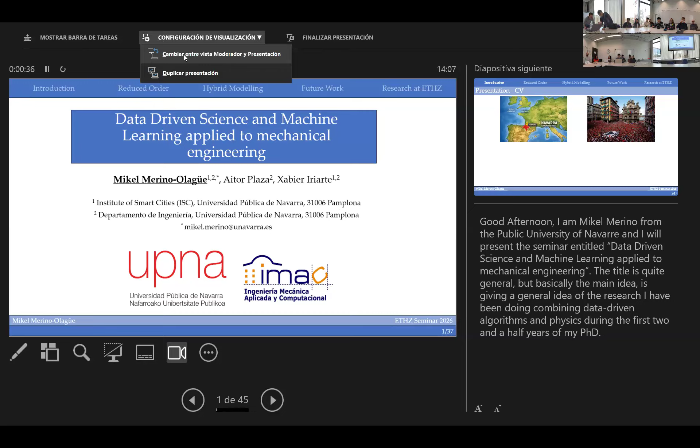And now we see that. Okay, so go out from Zoom. Go out from screen sharing, and then first open full screen on your laptop, and then share that screen.

I need to swap again. It's a bit complicated, but yeah. Is it now? And now share on Zoom on that full screen. It is good, yeah.

Okay, so good afternoon, everyone. I'm Mikel. My main goal is to tell you what I did.

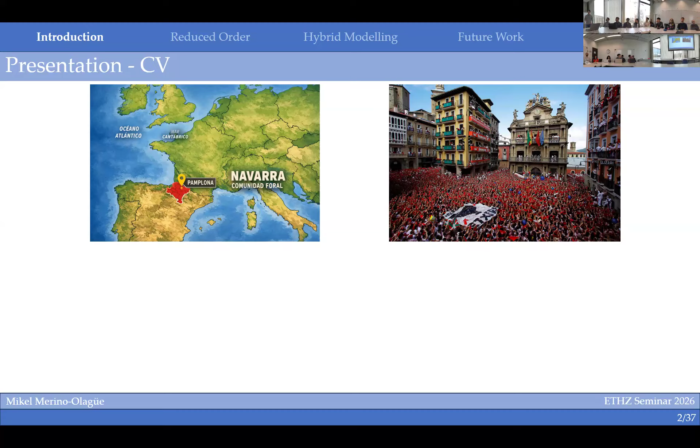So I did the industrial engineering bachelor, and I did a master's in applied and computational mechanical engineering, and then I started the PhD at the applied and computational mechanical engineering group. So in this group...

we basically do modeling, simulation, identification, and optimization of different mechanical devices. Also, there are some other research staff which are working on structural analysis. We have been also working in mechanical vibration.

Where on the left we have a recent work in solar panels, characterizing them with modal analysis. Also, we have been working in wind turbines and robotics, so quite multidisciplinary, but always focusing on modeling.

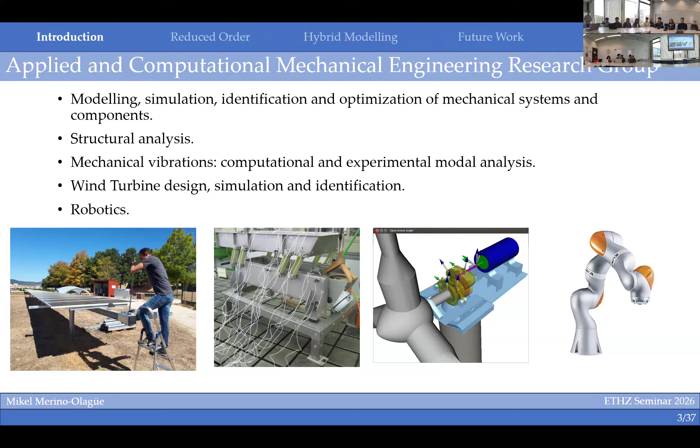So, during my PhD, the idea was to start using data-driven science for some tasks that we think could be beneficial for us. So we first started with reduced order modeling in wind turbine blades. I will give you a little hint about this, but right now this research line is quite paused, and I'm working more on the hybrid modeling task.

So the hybrid modeling task was originally developed to overcome an issue we have with this small device, which is an energy harvester that I will tell you a little bit about later. But basically, the problem was that there's a magnetic interaction, which is difficult to model. So here is where we decided to combine our physical knowledge

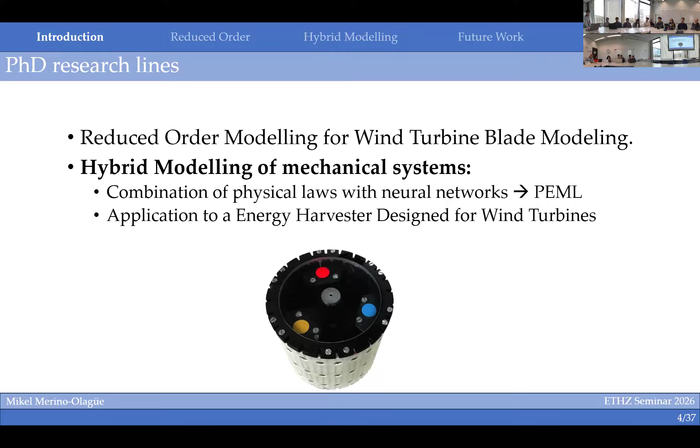with some machine learning. Okay, so as I told you, I will start with wind turbine blade modeling. Till now, with the smaller blades, the simulation programs usually with one or two modes per blade was enough to model those blades.

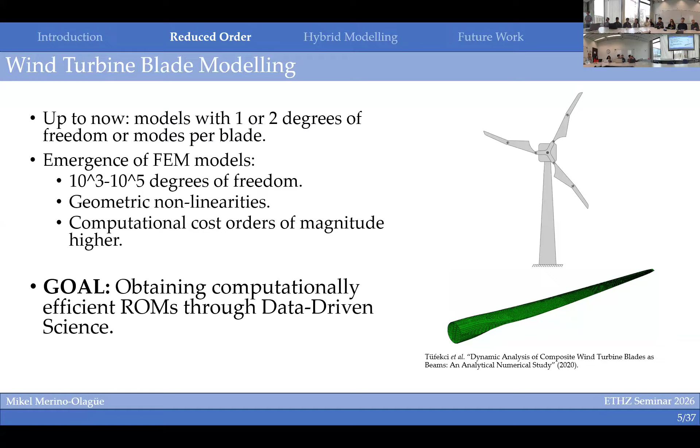So we basically thought about using a simple methodology, it's dynamic mode decomposition, which basically uses data to do a spatial temporal decomposition and obtain reduced order models. So basically what we do, on the left, basically data is collected, then we have two time shifted matrices, basically matrix X prime is shifted, so we can relate those through that state transition matrix A.

And then we have our regression problem, which is solved with the pseudo inverse. And here, depending on how many singular values we use on that SVD decomposition, we can get a reduced order model with different sets. So that was our idea.

We have also other variations of this algorithm. We have DMD with control, where we try also to estimate a B matrix to account for that external input. Extended DMD, where basically on that data collection, we also use a dictionary of functions to account for nonlinearities, and higher order DMD, which uses time delay embedding to use several instances to predict the next.

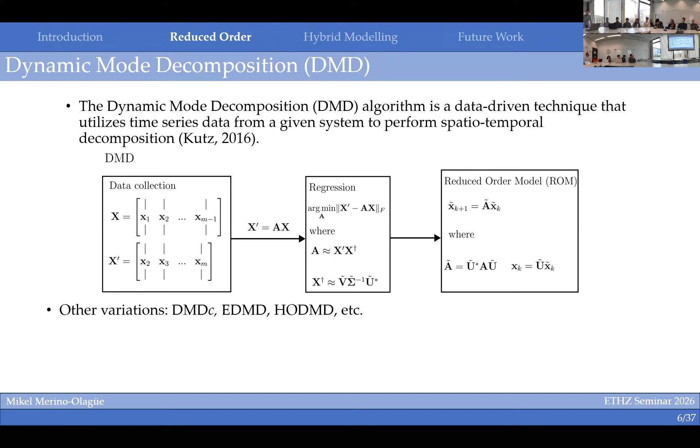Since our idea was to use this on nonlinear problems, we started with a numerical example, the most simplified wind turbine blade, a cantilever beam with geometric nonlinearities. In this case we used a really low Young's modulus to get really high deformations, and we tried cases with arbitrary initial conditions, external loads, and different scenarios.

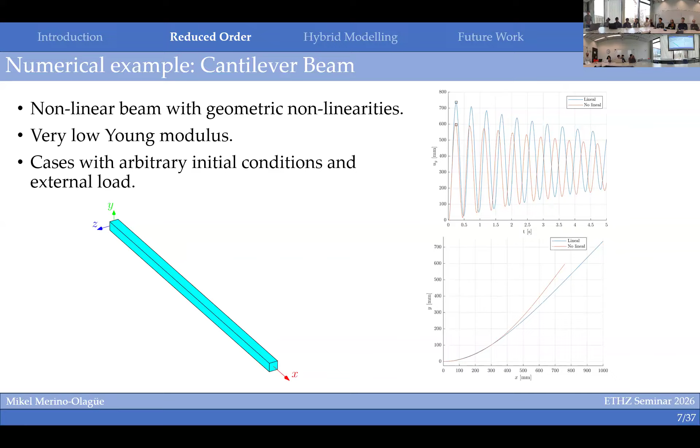If we compare the linear behavior in blue and the nonlinear in orange, we can see that the displacement of the free end node is completely different. And if we look at the deformation of the blade, it's also completely different. So in theory, a linear model won't make any sense.

But we first tried with this DMD methodology. It's very simple: we use finite element modeling, simulate the model, and collect those data matrices. The last one is with the external inputs, so depending if we use it or not, we get a reduced order model with the possibility of using external inputs or not. Then we validate the different models and use them for simulation.

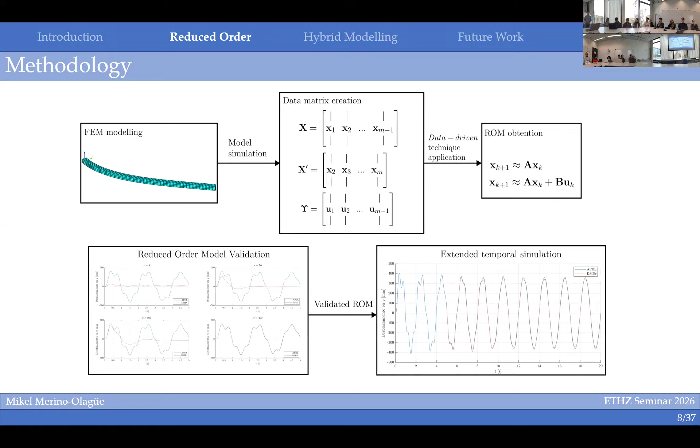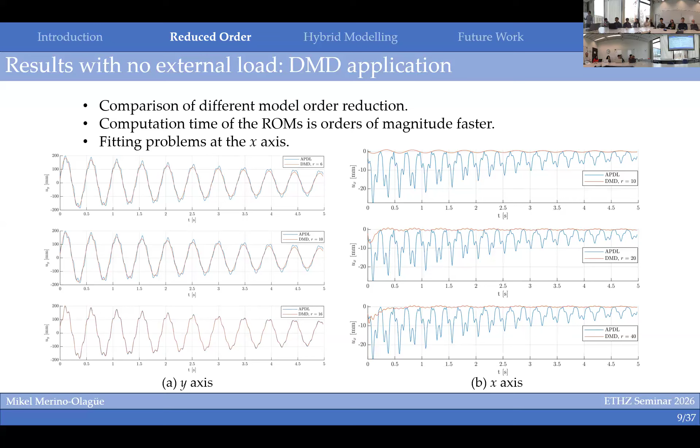Using DMD here all the time, in blue will be the simulated data, and in orange the model. We can see that if we use more singular values, we get a better model. But in this case, we could capture the dynamics on the y-axis, while on the x-axis, since it's more nonlinear, we couldn't capture it. So that's why we jumped to higher order DMD.

And in this case, we got a massive overfitting, and basically the model was only usable for this specific case. So if we change slightly the initial conditions, it won't work.

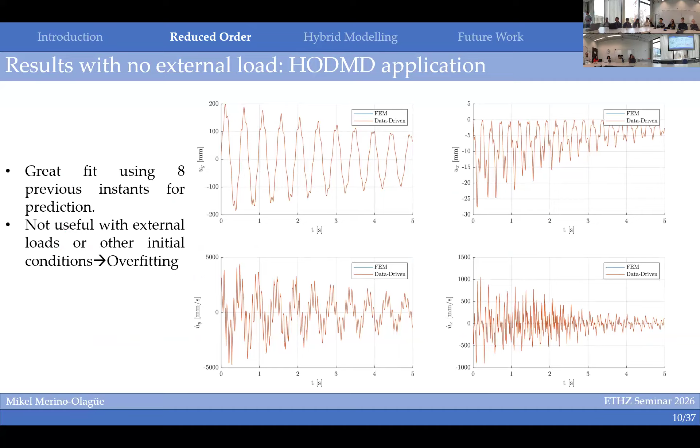Obviously, DMD with an external load is problematic since we don't have that B matrix, or we are not estimating it. Using a lot of singular values we could get a decent result, but on that matrix, unstable poles were appearing - you can see there are red, so the models were basically unusable.

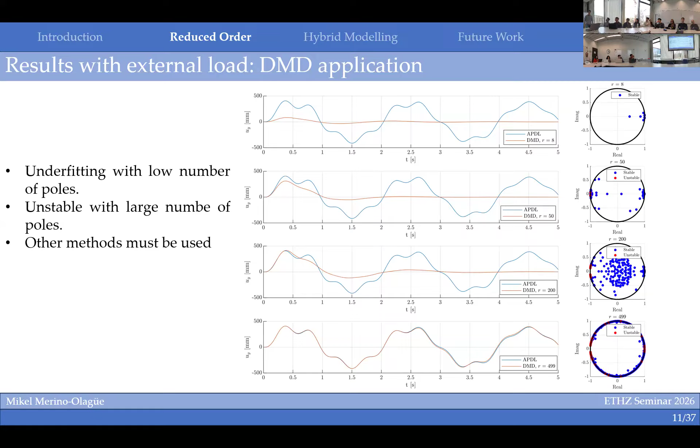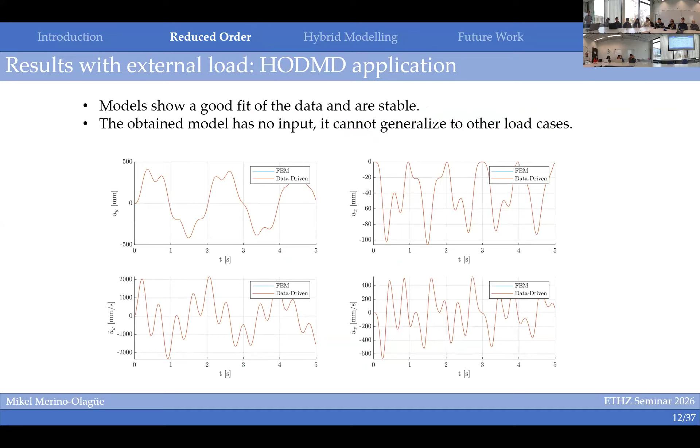Higher order DMD again is able to capture the dynamics, but again we have a massive overfit, and we don't have any possibility, since we don't have a B matrix, to use it in other load cases.

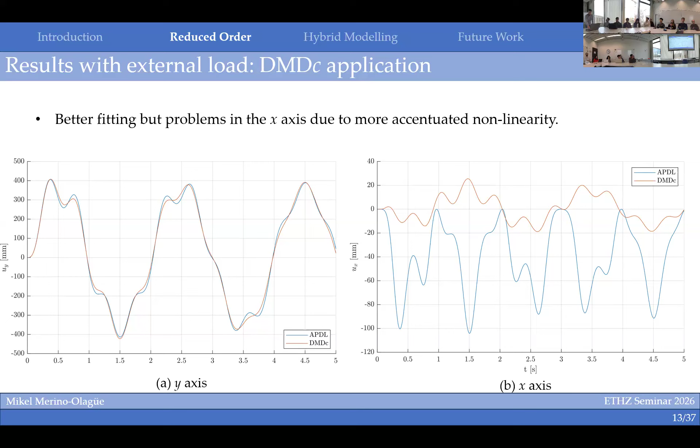With DMD control we solve some problems, but again we are not able to capture the nonlinearity on the x-axis. So we decided to add control to higher order DMD, and also to add those dictionary functions from the extended DMD.

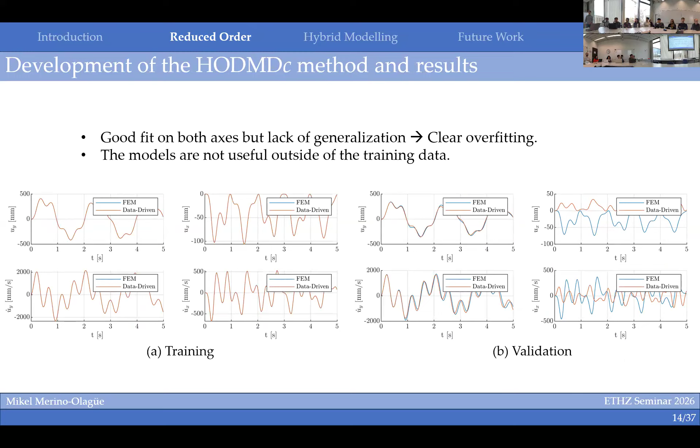But still, even if we were able to fit the data, we got a clear overfit. By introducing a slight change on the external load, we couldn't then validate the model, so basically the only use of all of this is maybe using it as a surrogate model - adjusting the model with the first couple of seconds, and then if the external load case and everything is exactly the same, it could work.

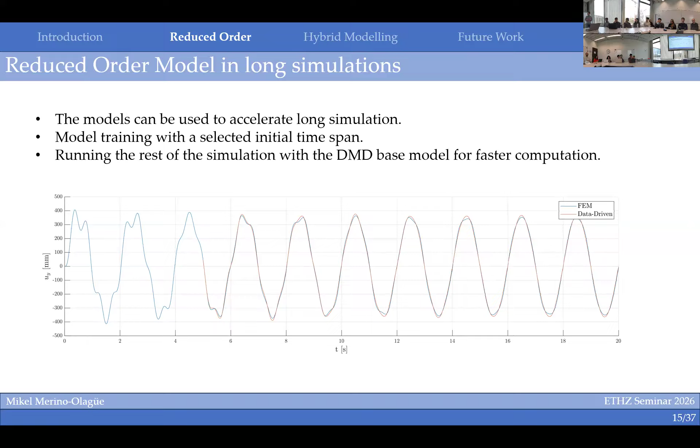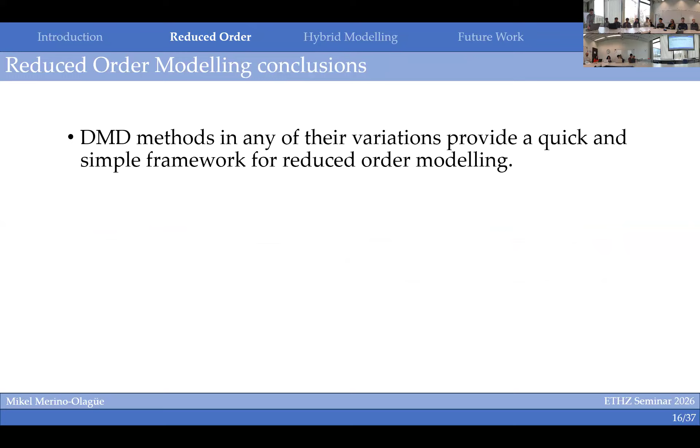But honestly, this led us to pause this part of the simulation and go to another task, since it wasn't good. So as I told you, it's quick and fast, but it either underfits or overfits the data.

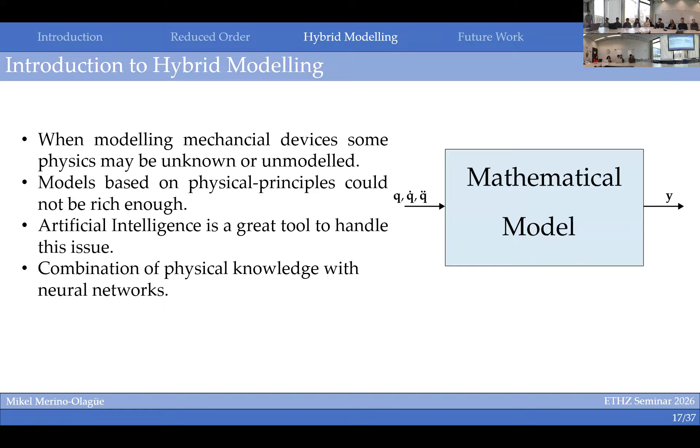So going into hybrid modeling, this is a completely different task, but we will also use data-driven models. Usually when we have a mechanical device, we would like to have a mathematical model - in this case, for example, position, velocity, and acceleration as input, and then we estimate the external output we are getting. But as I told you, in the energy harvesting device, some parts of the model may be unknown. That's where we decided to introduce a machine learning algorithm, a neural network, or something else - so here is hybrid modeling.

So as I told you, all this came from this problem, which is the modeling of an energy harvesting device. This small device has more or less the size of 10 centimeters, and you can hold it with your hands.

It's intended to be located in the nacelle of the wind turbines, and the idea is that it uses the vibration energy of the nacelle to obtain a small voltage, which will feed an autonomous node, thought for wind turbine monitoring. So basically, it will feed all the accelerometers and even the post-processing part.

So this small device has two parts. One part is basically a stator, which has some coils, and the inner part are three blades with some magnets. When the wind turbine vibrates, these three blades are moving, and they create a variation in the magnetic field, which induces a voltage in the coils of the stator. We get a small amount of energy, but this is enough usually to feed those small sensors.

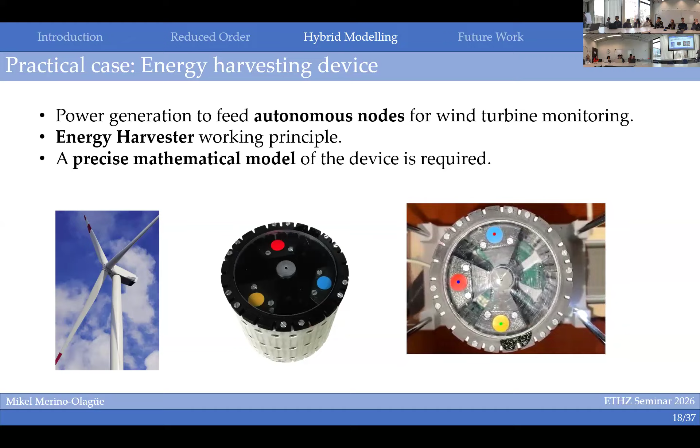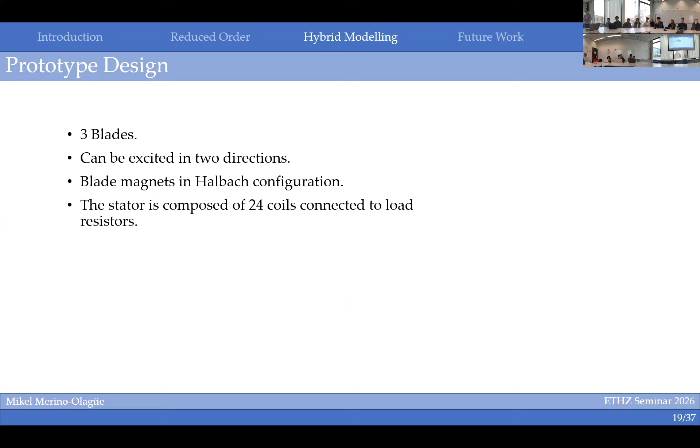So as I told you, the harvester has three blades. The magnets are in a Halbach configuration, which is important from the electrical point of view, and we have 24 coils. This was also adjusted by the guys working on the electrical side. As I told you, we have the three blades and the stator with the magnetic coils.

Coming into the modeling of the dynamics, you can think of this system as basically composed of three pendulums, but those three pendulums have an interaction between them which is magnetical and is quite difficult to model.

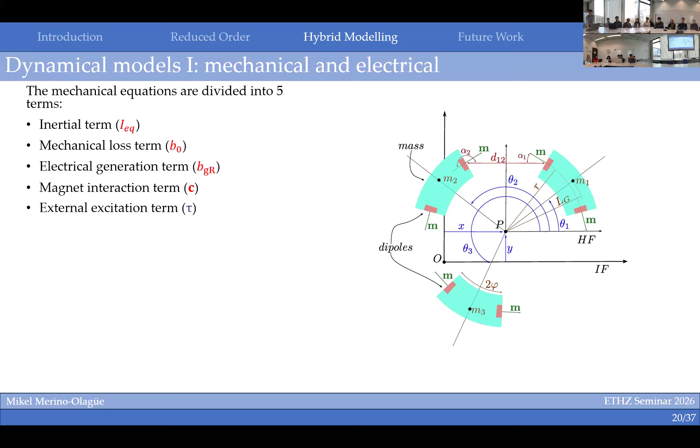So we have five terms for the equation. We have the inertial term, the mechanical loss term, the electrical generation term, which depends on the resistor connected to the coils—this will make the system more damped or less, and the energy output different, and this has to be adjusted as well. We have the term for the magnetic interaction, and the external excitation, which is basically the vibrations of the mass.

And here, as you can see on the left, we have that magnetic interaction, which only depends on the positions of the blades. We also have the electrical part, which is a model depending on that electrical generation term, and we can get the power output of the device with this.

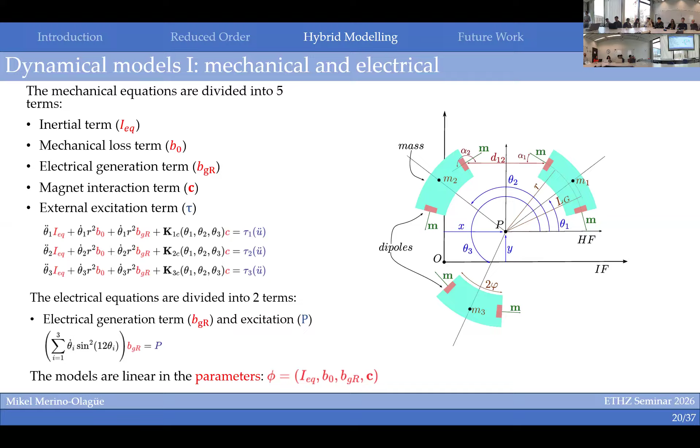And as you can see, the models are linear in the parameters, so we always have something multiplying the parameters, and this is really positive, since we can then use least squares to solve the identification problem.

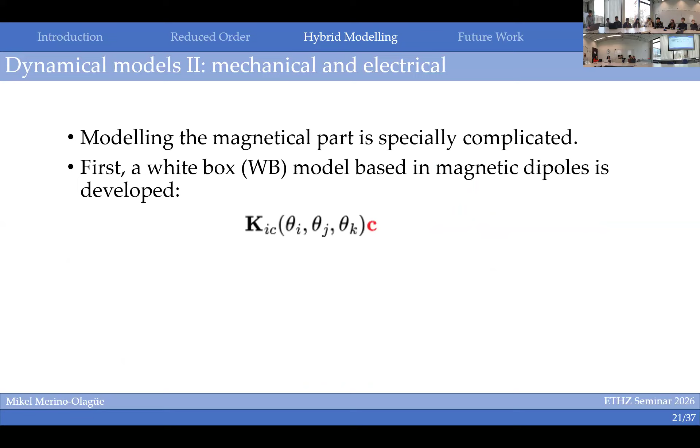So as I told you, modeling the magnetical part is especially complicated. First we started with a white box model, which was based on a simplification of magnetical dipoles between the different plates, which is this one. It depends only on the positions of the blades.

And we have here this term, which is the potential energy, and then it's derived, and we get the value of this term. What is the problem here? We only have one term in red, which means this model is not too flexible, so it's quite complicated to adjust it to the data.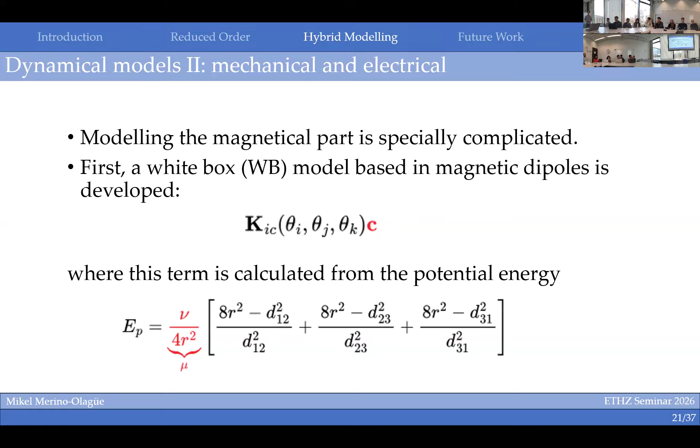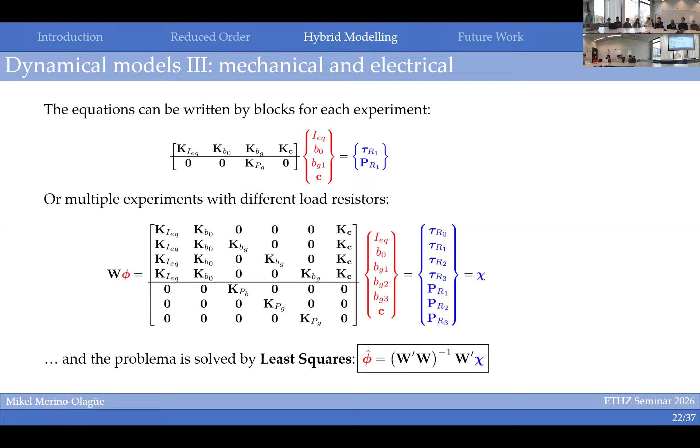As I told you, what we first did was write equations in a linear equation. We can also do it for different load resistors, since we write different combinations, and then solve this problem by least squares.

Okay, so now we need the data. The data is obtained with this setup here, where we have the harvesting device as number 1, then we have the platform. We can adjust the excitation, and then we have the data acquisition through the mobile phone, which is high frequency video. We also have an accelerometer in the platform, and we can also measure the voltage and power generated at each of the coils.

And then we synchronize all those three measurements with an LED light, which is attached to the platform, and it appears on the video recording.

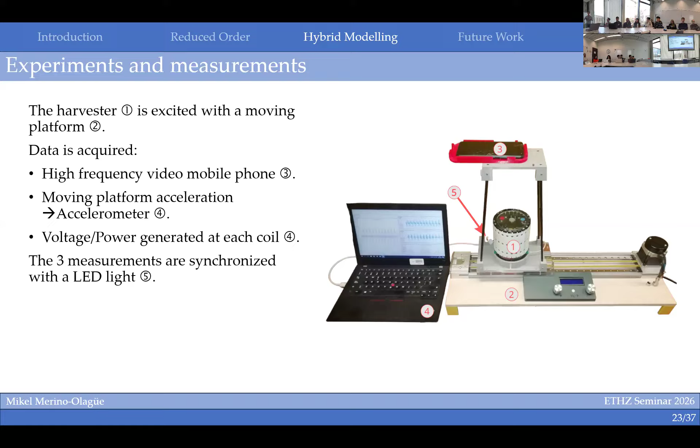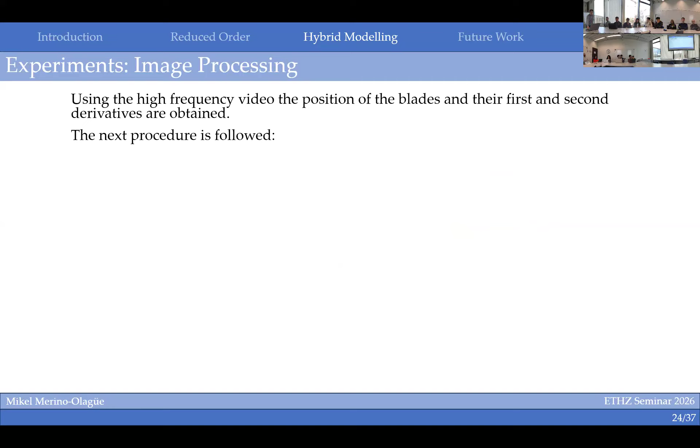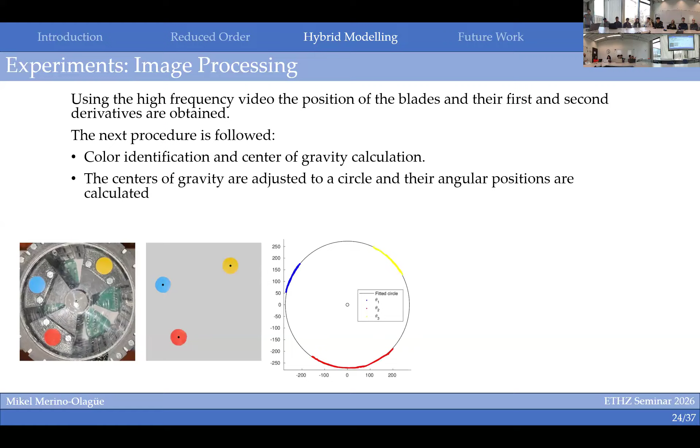So, targeting all the data, we first do image processing to get the positions of the blades, and also the first and second derivatives. First, we identify where in the video those center of gravities of the stickers appear. We fit a circle, get its center, and with the arctangent method, we can get the blade positions. Then we do Tikhonov regularization to smooth all the signals and get the derivatives. So basically, we have access to the whole state of the system, which is really helpful for system identification.

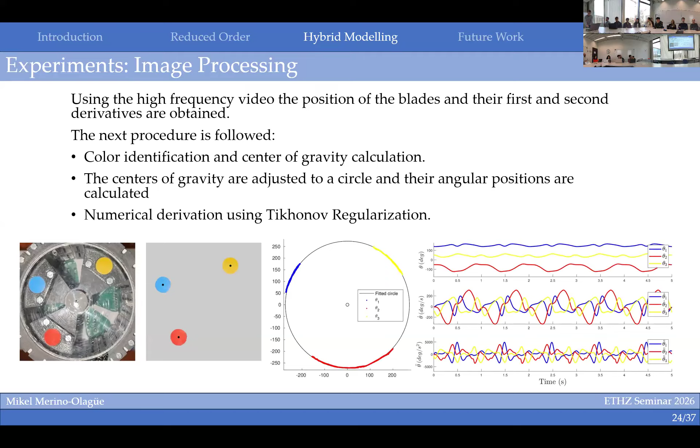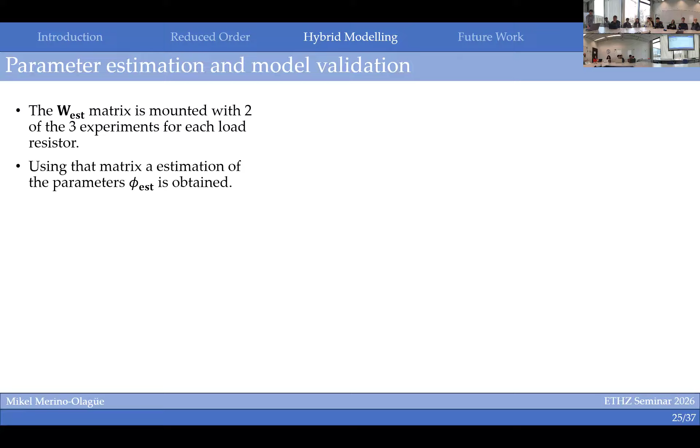Since we have 3 experiments, we use 2 for training and 1 for validation. We get the estimated parameters, and then we do the validation. As I told you, the model is not flexible enough.

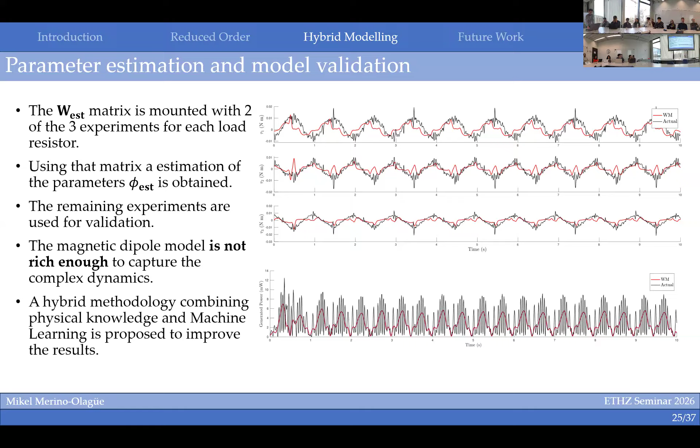So here we decided to jump into a grey box model for the magnetic term estimation. Basically, we combine the physics, which depend on those parameters theta, with a neural network, which depends on the parameters phi, and put them all together to get a hybrid model.

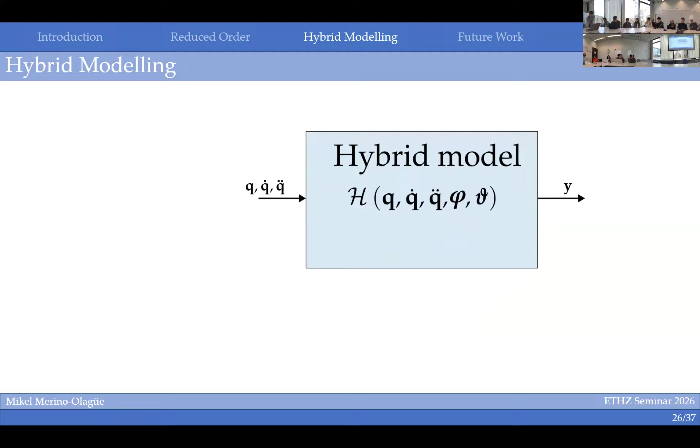So we have those known terms plus the unknown terms. In this case, the function with the unknown terms is basically a feed-forward neural network, really a simple one.

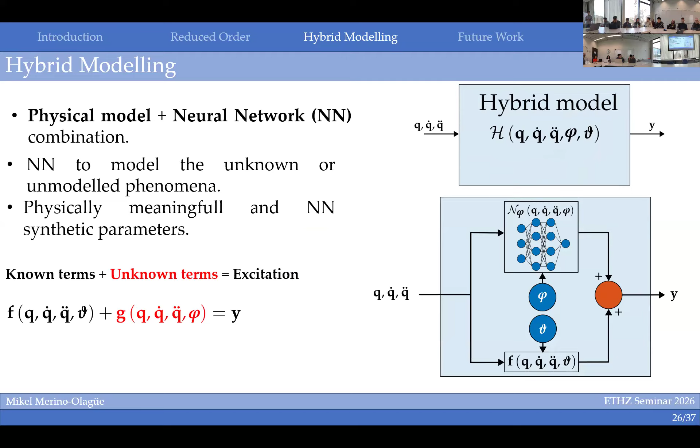In the case of the harvester, the magnetic term is what will be modeled with the neural network. And since we know this interaction only depends on the positions of the blades, we will only use them as input to the neural net. We also have the three physical parameters, and we will estimate their values.

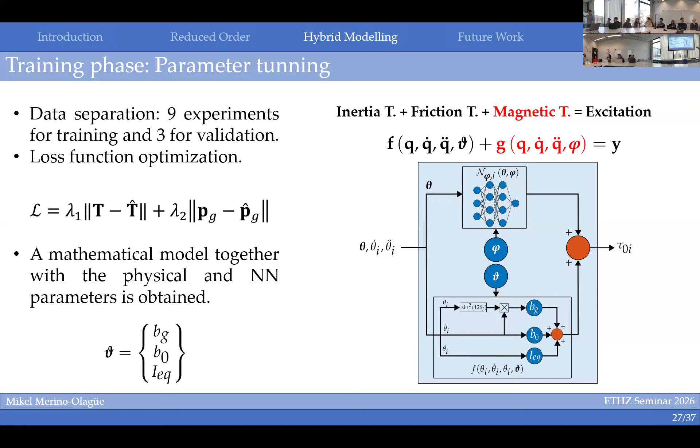We have a loss function. In this case, we use the torque measurements and their difference with respect to what we get from the model. Since we also have the power output model, we can use that in the loss function too. After the optimization process, we get a mathematical model, and also the values of the physical parameters.

When it comes to validation, yes, as you can see, we have really noisy data from the measurements. As I told you, when the platform reaches the end and changes direction, there's an overshoot. So the measurements are quite noisy, but our predictions with the hybrid model were way better than what we were getting before.

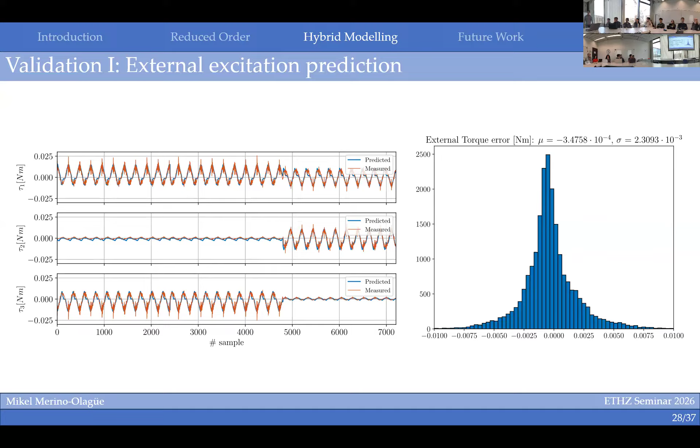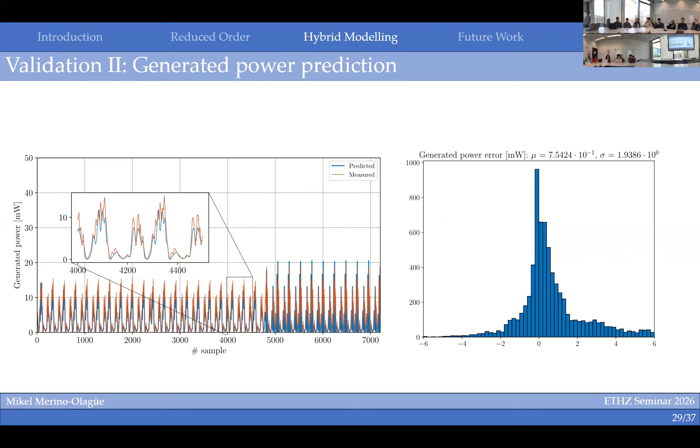Also, if we look at the generated power prediction with our model, the measurements are in orange and the prediction in blue. You can see that we got a much better result.

So with this model, our idea was to try different configurations and see which one could get good results in terms of energy output, but we also couldn't go huge in size, since there's limited space to get the energy harvested in the nacelle.

So what we did was rearrange all the blocks from our model, and now the output will be the acceleration. Since we can get the acceleration, we can use normal numerical integration and predict which energy output we will get with any signal.

This is really interesting. Some of our experiments tried duplicating the inertia of the blades to see which power output we were getting. In fact, there have been more prototypes of this device, and now we are using more inertia on those blades with other materials in order to get a better energy output.

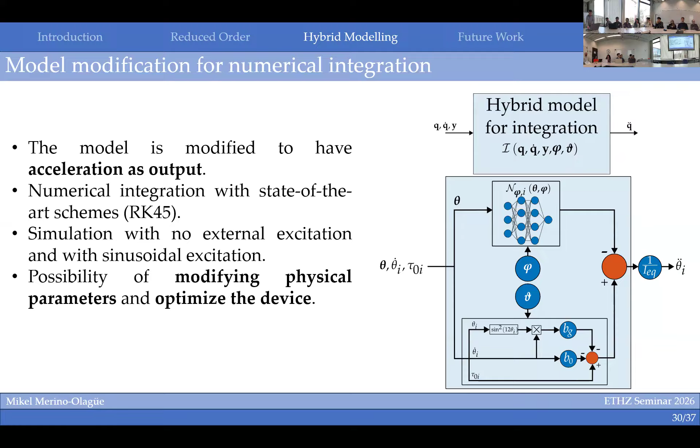And it's again a little bit the model we rearranged. So we did some numerical examples here to see if the model was correct, at least empirically. First, we put the blades out of their equilibrium position and simulated this without any external excitation. As you can see, they all go back to the equilibrium position. There's a bit of power generation at the beginning, and then everything goes to zero.

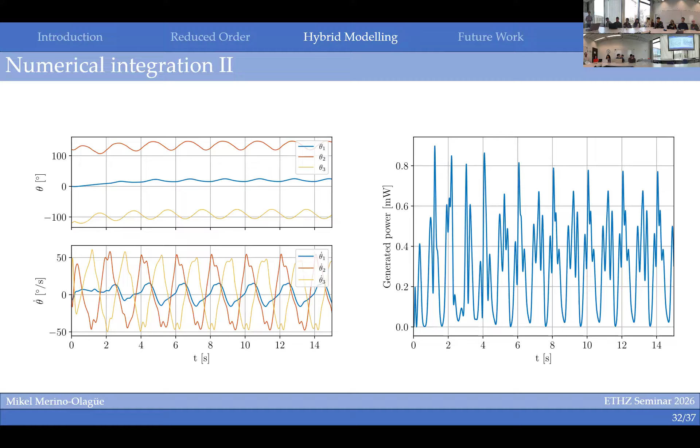We can also linearize the system using automatic differentiation, which is interesting to see if the system is stable or unstable, or how it works if we want to make any changes. In this case, the electrical friction is really high, since if you want to get energy output, you need to take it.

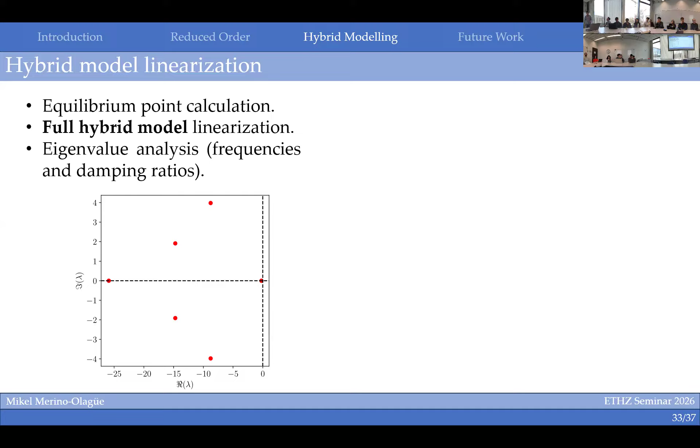So basically the electrical friction is really high, and we have a real pole really close to the origin, so the system is working as an overdamped system. Here's a simple experiment with a linear and non-linear model. As you can see, it doesn't do any harmonic oscillation, so it's clearly overdamped as expected. If we try to move the blades by hand, we could also see that it was really overdamped.

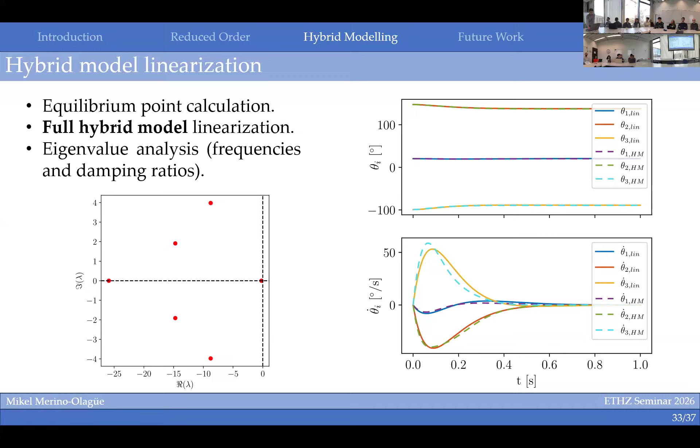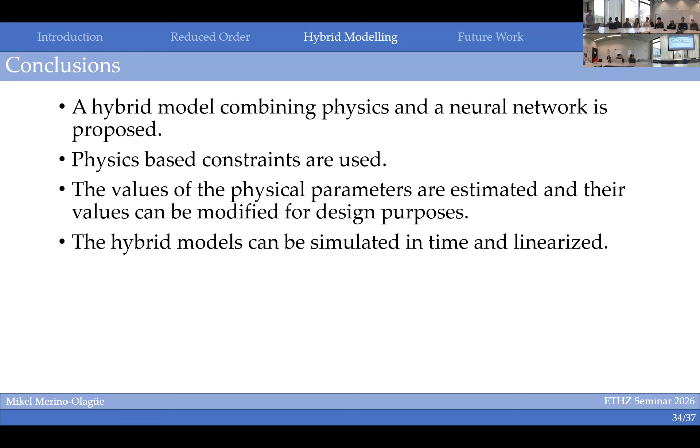So as a conclusion, with hybrid modeling we are combining physics and a neural network for the unknown part. We are using some physically based constraints, we can estimate the values of those physical parameters, and we can modify them for device optimization. We can also simulate the model in time and linearize it.

So basically we have a tool to optimize these real world mechanical devices. Coming to the end, with the future of the PhD work, the main idea is applying this methodology to other problems that we have in mind, maybe to some problems here at ETH.

Quantifying model uncertainty, and then uncertainty in the estimated parameters as well, and also obtaining accurate models when full state measurements are not available, which will be the case, for example, in a structure where we are only measuring accelerations.

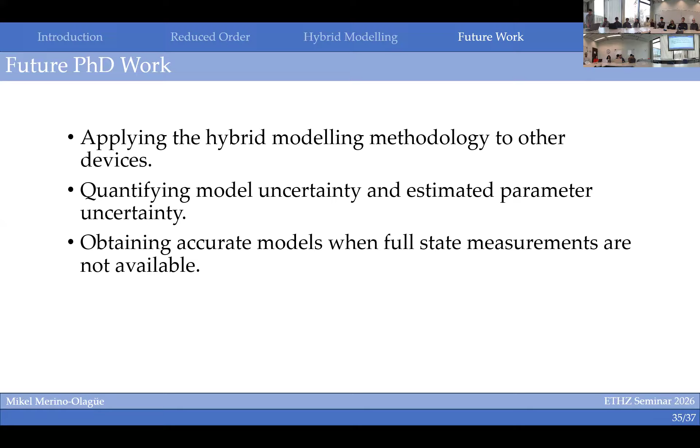It's not completely clear yet, I guess, but my research here at ETH Zurich will be maybe trying my methodology in some structures or some problems here, and also trying other algorithms in this device.

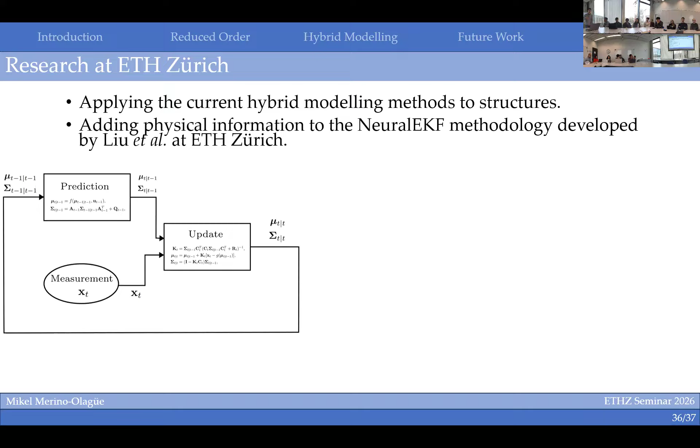And also last week we were discussing a little bit about adding some physical information to the neural extended Kalman filter methodology that was developed here. Basically, this methodology is a Kalman filter, but the transition and observation models are based on neural networks. So the idea is to introduce some physical information into these two models, to maybe obtain better results.